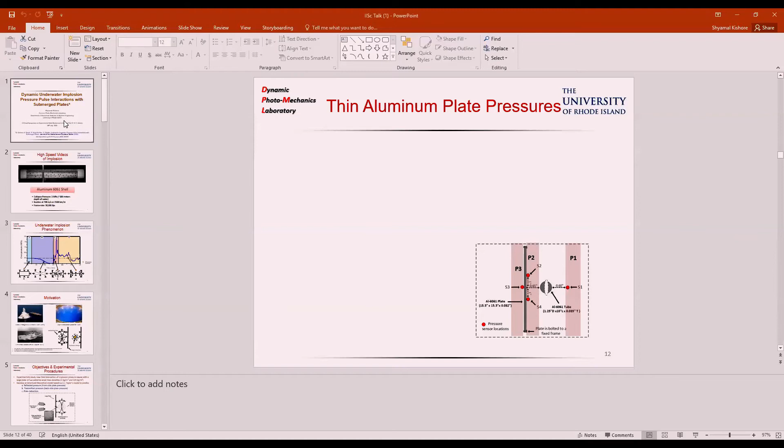Thank you, Professor. Can you hear me all right? Yes, you have about 25 minutes. Okay, at the 20th minute I'll give you a reminder.

All right, thank you. So thank you for the opportunity to present and thank you for the introduction. So as Professor Swanti mentioned, I'm the student of Professor Arun Shukla, and Professor Simha is known to my advisor, and it is my honor to present at the symposium which is organized in his honor. So first, on behalf of all the students at our lab, I would like to wish Professor Simha a very happy retired life.

And with that note, I would like to introduce the topic of my talk. Today I'm going to be talking about dynamic underwater implosion pressure pulse interactions with submerged plates. I'm sorry, if I can just turn my video on.

So today I'm going to be talking about dynamic underwater implosion pressure pulse interactions with submerged plates. So what is implosion? Essentially, it is a rapid, dramatic collapse of shells under hydrostatic pressure. And since we are looking at underwater situations, there can be a very complex fluid structure interaction phenomena that can occur when there is another structure nearby. Implosion is usually accompanied with a very dynamic pressure wave that is released and can be damaging to a nearby structure, and that is why this problem is of interest to us.

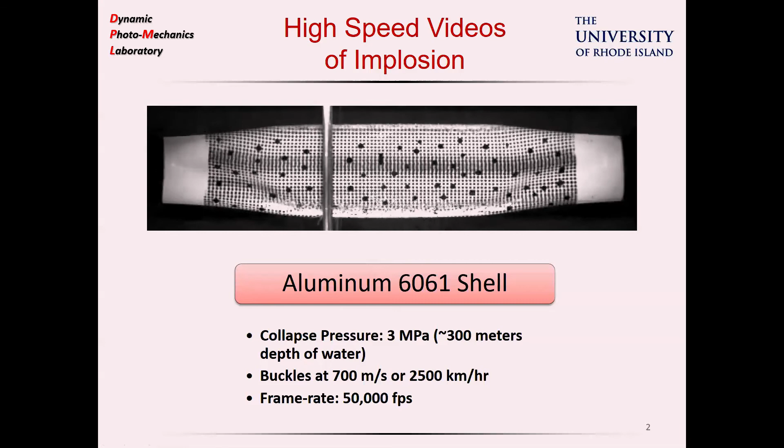And I'll play the video right now. The collapse pressure of this tube was about 3 megapascals, or about 300 meters depth of water. Because this video is taken at 50,000 frames per second, it is hard to appreciate the speeds at which this process occurs.

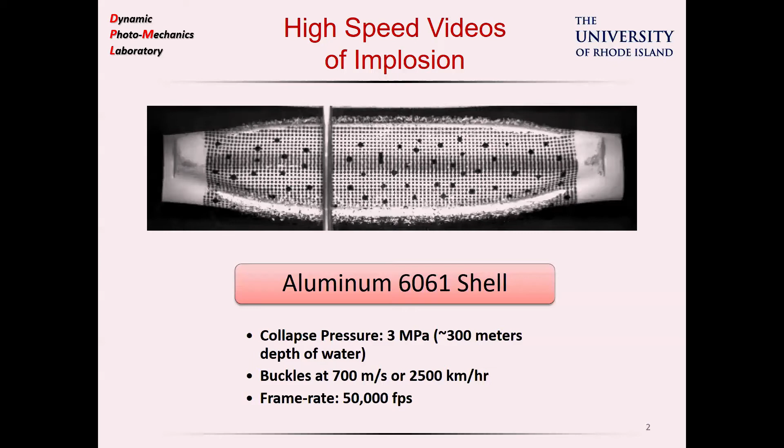In the implosion, the buckling waves can reach velocities of 700 meters per second, or 2,500 kilometers per hour. The associated fluid motion, when brought to rest, can really result in damaging pressure waves, and that is why this problem becomes challenging and hard to understand and predict.

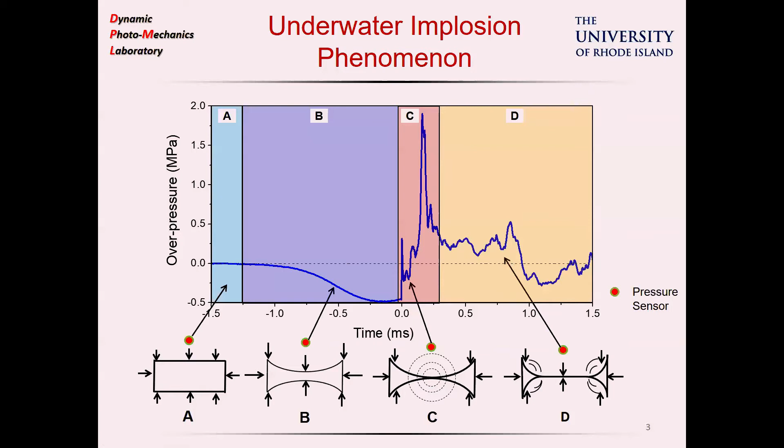In phase C, the wall contact occurs - you can see the wall contact occurring here, and that is accompanied by this small minor acoustic spike. Then as the wall collapse begins to propagate along the length of the tube, we have a large, broad overpressure spike followed by a decay profile, which is based on the length of the tube and other such factors. This overpressure spike, in addition with the underpressure pulse, can be extremely damaging to a structure surrounding next to it.

We would also like to apply some of the knowledge gained in this work to problems such as interaction of shock waves underwater with structures such as ships. Here's an example: shock testing of the USS Gerald R. Ford, an aircraft carrier, which was tested for its response to a massive shock wave occurring at a distance. This problem is of interest to the Navy.

Another relevant example, in the case of India, is India's only loss of a battleship in war: INS Khukri, off the coast of Diu in Gujarat in the 1971 war. There were 194 casualties when a submarine torpedo hit the ship, causing its loss. Shock waves from underwater can really cause damage to structures, and that's why we want to study dynamic pressure pulses interacting with structures.

In terms of implosion, a very interesting accident occurred in Japan at the Super-Kamiokande Neutrino Observatory, where a huge array of borosilicate glass shells is used for neutrino observations. One of these glass shells imploded under pressure, causing a cascading implosion of 7,000 nearby shells. This highlights that when an implosion occurs, there can be a cascading effect of shock waves propagating outward, which can implode further structures, damaging secondary structures.

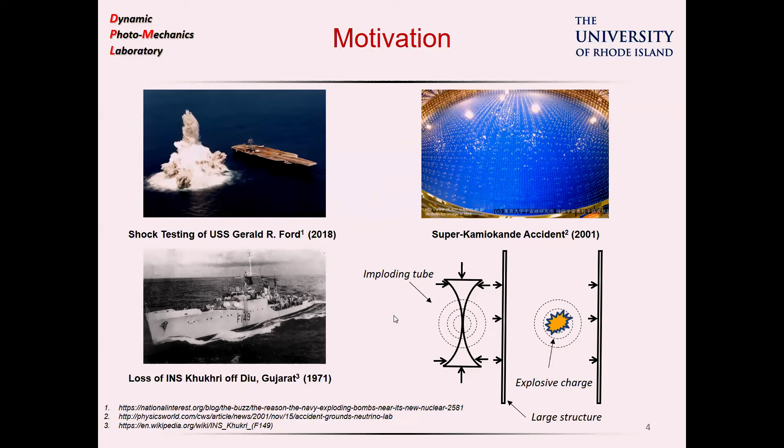The objectives of this experimental study are to experimentally study the fluid structure interaction process with two plates of extreme areal mass densities: one extreme at 2 kg per meter square, and the other at 100 kg per meter square. Based on that, we want to develop a theoretical model starting from G.I. Taylor's original model from the 1940s.

We also mount dynamic pressure sensors at various locations. Reflected pressure is the pressure seen on the plate on the side facing the dynamic pressure source, here the implodable. We also want a measure of transmitted pressure, the pressure that travels across to the other side. If there's water on the other side of the structure, transmitted pressure can go onto that side, causing a damaging effect on structures.

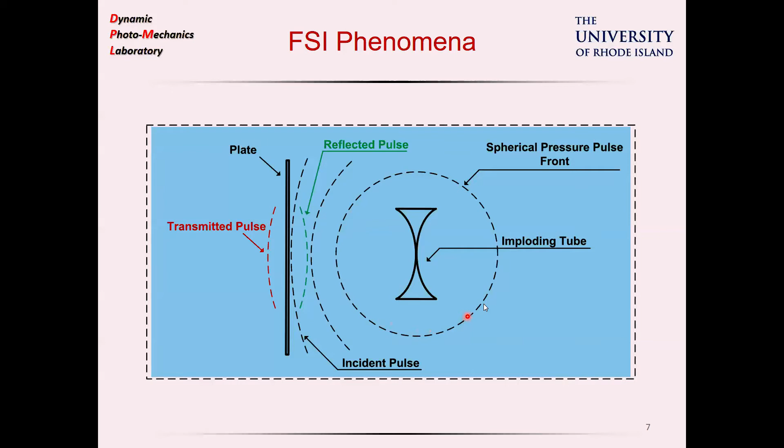The assumption we're making in this study is that the pressure wave released from an implosion pressure front or implodable structure is spherical in nature, although that is not truly the case. However, it helps simplify the explanation of the phenomena a lot.

When the structure implodes, the plate itself gets drawn in with the under pressure pulse. As the fluid moves towards the collapsing walls, the plate also gets drawn in. Once the tube makes wall contact, the overpressure pulse is reached, and then there is a return or retraction of the plate deflection.

However, in our study, we did not observe the retraction back to the same levels as on the other side. This can be understood in the sense that once the fluid is being pushed towards the collapsing tube, there is momentum in all the fluid surrounding the plate, so it's hard to push back all the mass of water attached to the plate and swing it back completely like an oscillator on the other side.

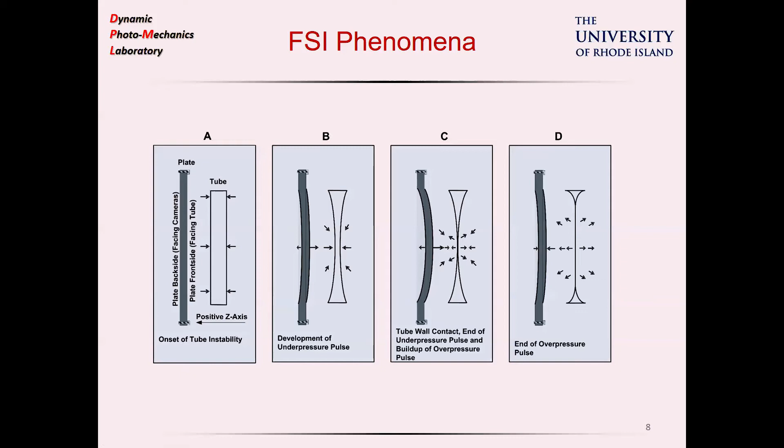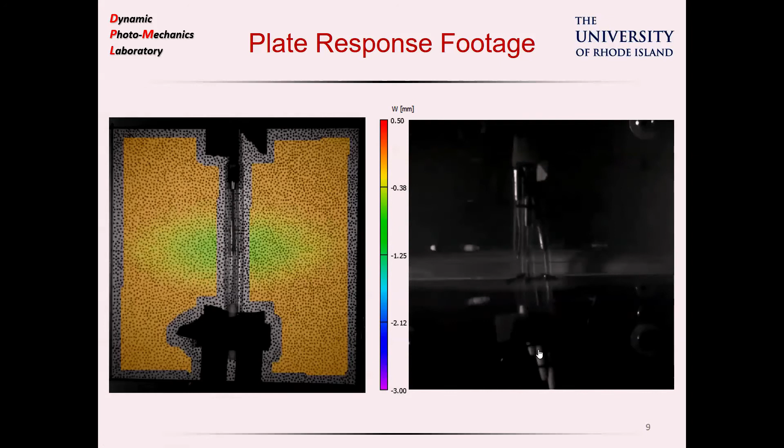At the center, you'll start seeing elliptical contours develop based on the profile of the implosion. I'll play the video so you can see what is happening: the wall collapses, followed by the elliptical structure developing, which then propagates outwards, and eventually boundary effects start to play a role.

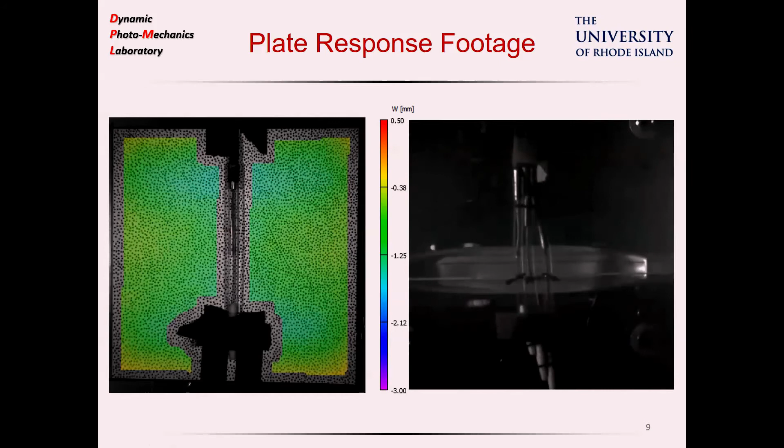So what about the pressures themselves? We look at three planes of interest. The first plane, P1, is right behind the tube itself at a distance of about 0.5 inches. On plane P2, we mount sensors measuring the sum of the incident and reflected pressures. On plane P3, we measure the transmitted pressures.

In the thick case, we consider two plates: this is the case of 100 kg per meter squared areal mass density, a thick steel plate of half-inch thickness. What we expect to see here is a large reflected pressure because the incident wave interacts with what is almost like a rigid body.

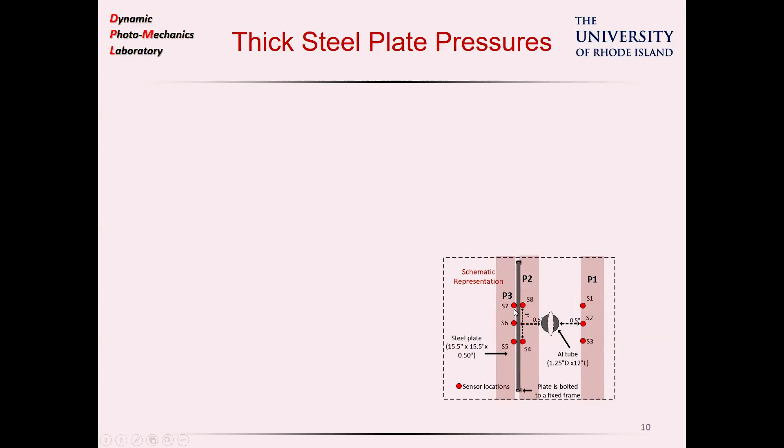When a pressure wave hits a rigid structure, the pressure doubles. So that is what we will see, almost a doubling of the pressure on plane P2. But on plane P3, we will see a small amount of transmitted pressure.

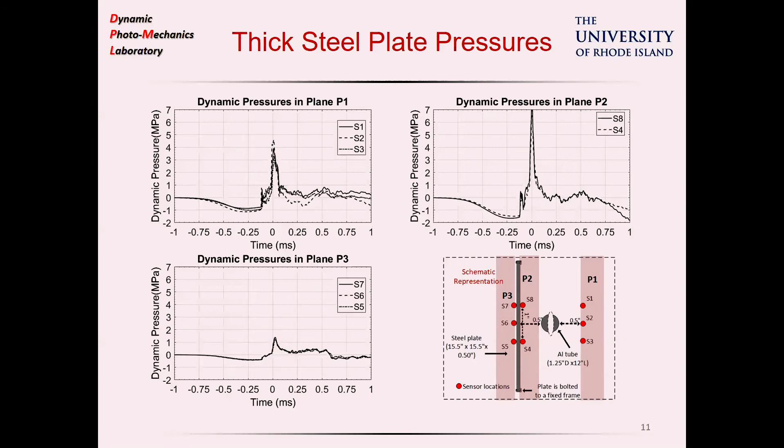Here are the plots of this example. On plane P1, we have a pressure profile with an overpressure peak of about 4 megapascals and an under pressure peak of about minus 1 megapascal. This almost doubles on plane P2 to about 7 megapascals and almost minus 2 megapascals. There's a small amount of transmitted pressure, about 1 megapascal and about 0.5 megapascal. This is what we expected based on the thickness of the plate: a very small amount of pressure pulse transmitted on the other side.

Now what happens when we have a low areal mass density case? For that, we consider a thin aluminum plate of about 32 thousandths of an inch thickness. Aluminum has low density, so the areal mass density reduces.

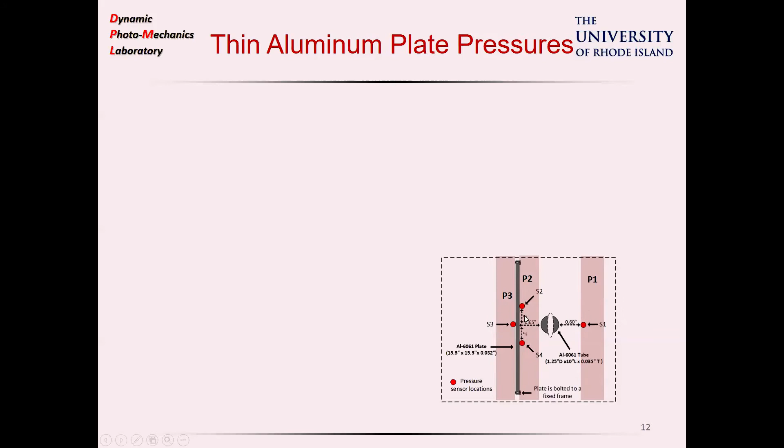In this case, we see very small, negligible actual reflection. What you'll see on plane P2 is basically the incident pressure itself, and on plane P3, almost all of the pressure gets transmitted, as seen in these plots.

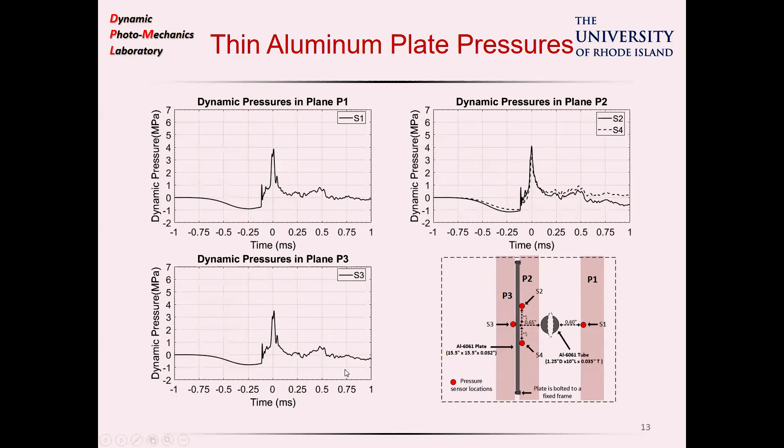Here's the incident pressure pulse, and the reflected pressure pulse is almost the same height and profile, with the transmitted pressure also about the same profile. This is in much contrast with the previous case. So how do we understand this theoretically?

Foundation work was done by G.I. Taylor, who developed a single degree of freedom model in 1963. So what I will do, my theoretical modeling is done in 4 steps. So first I take G.I. Taylor's single degree of freedom model.

I generalize it to a generalized pressure wave, because G.I. Taylor's work was done for an exponential decaying shock wave, so I generalize that for a pressure wave like this. G.I. Taylor's work also only includes air backing, meaning there's no water on the other side, so in step 2 I add a water backing effect to this first step. The first step I call model 1 for convenience, and step 2 is model 2 with the water backing.

Then step 3 is where I add a bit more difference compared to G.I. Taylor's work. In this model we incorporate plate bending, and this plate bending solution was given by Sneddon in 1946 for a Gaussian pressure distribution. So I use that solution provided by Sneddon to follow the same steps followed by G.I. Taylor to come up with a model that can predict relevant quantities.

However, there's one more correction I'd like to make, and that's how we understand the fluid velocity. In G.I. Taylor's model we essentially assume an acoustic kind of fluid velocity model. However, when we include Rankine-Hugoniot effects to describe the fluid velocity, there's something called afterflow fluid velocity, which is not just the main pressure wave, but something following behind the pressure wave associated with large fluid motion, and that has an associated pressure. So that velocity has to be corrected for this afterflow fluid velocity, which was proposed by Arons and Yennie in a 1948 paper.

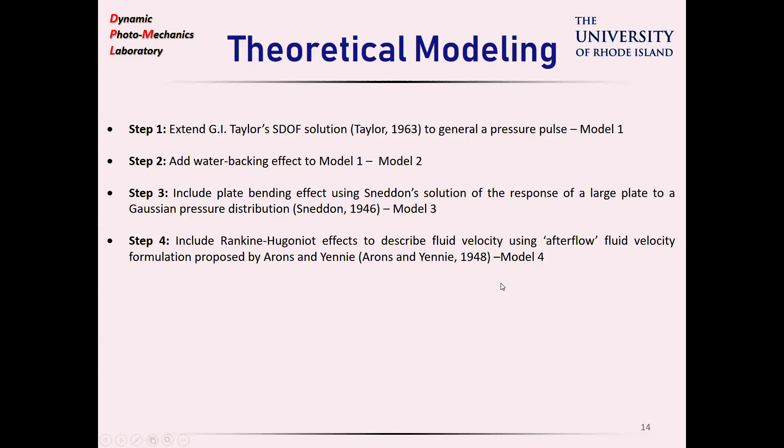So I combine these characteristics to develop model 4, which is the best model provided in the paper.

First, to begin with application of Taylor's model, here's a schematic. We have a pressure wave going out, and we have to assume a uniform planar distribution in this case. Taylor's model considers an infinite plate, and uniform pressure distribution is only strictly true when the pressure waves are coming from a large distance. So when we have implosions occurring in close proximity, or a shock or explosion going off in close proximity, this assumption is not strictly true. That's one of the limitations of Taylor's model.

So what Taylor does is consider the fluid velocity with this equation, pressure over rho times c, which is a well-known acoustic formulation of the fluid velocity. And we consider an areal mass density of m, which is mass per unit area of the plate.

So on this side of the plate, the pressure acting, the force acting on the plate, is basically pi plus pr, incident plus reflected, times the area of the plate. Then on the other side we have a transmitted pressure, pt times area. So the net force acting on the plate is pi plus pr minus pt.

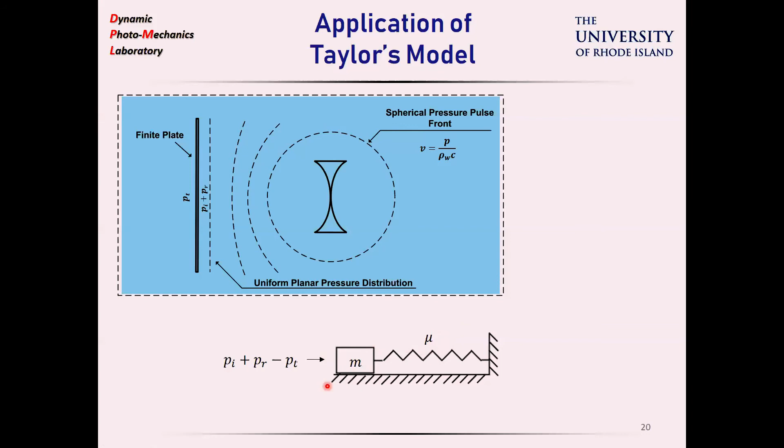Taylor's model considers this as a single degree of freedom model with a spring, and the spring essentially accounts for the finiteness of the plate. If you can figure out through other means what the frequency of the plate is, that frequency is given by mu, and we have an areal mass density of m with the force acting of pi plus pr minus pt. So Taylor's model essentially develops this kind of system for the plate.

One more thing is the equation of continuity considered at the plate, which is an extension I've done of Taylor's model: the velocity induced by the incident shock or incident pressure minus the velocity induced by the reflected pressure should equal the plate velocity, and should also equal the velocity of the fluid induced by the transmitted pressure. These are the 3 basic steps of the model, and this is model 2. For the sake of time, I would only be discussing model 2 and model 4.

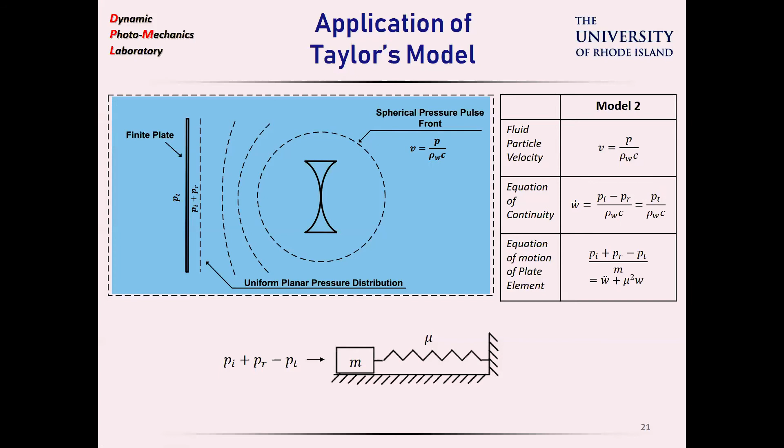In model 4, I take the solution provided by Sneddon, who calculated the plate response in air to a Gaussian pressure distribution. This Gaussian pressure distribution can be a generalized load distribution profile applicable to any kind of shock loading, ballistic loading, or other dynamic problems of such kind. Sneddon considers an infinite plate with plate bending stiffness.

And the equation of motion transforms in this way. We have the net force on the left side, same as before, then we have the inertia term, and plus we have this other term. We've gotten rid of the spring force, but we've added this plate bending term, which is b squared times del power 4 of w.

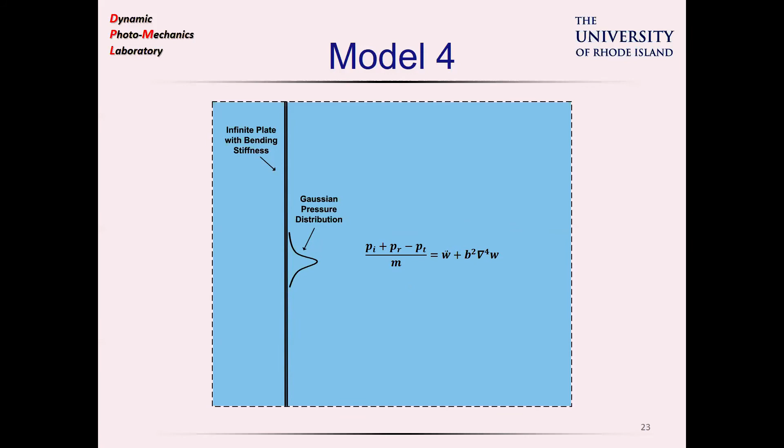So this is the solution that Sneddon provides in air. I have combined the solution provided by Sneddon for the fluid domain and also incorporated the equation of continuity for this case. So what is the difference in terms of the afterflow fluid velocity?

There are two parts of this fluid velocity. One is called the radiated flow flux, basically the energy that is released outwards and never returns back to the source of the implosion, and the flux is proportional to 1 over r squared. If you take a sphere enclosing the source, of an area proportional to r squared, the energy is always constant at any radius, which means the velocity is constant at any radius, which means this is going outwards to infinity and not returning.

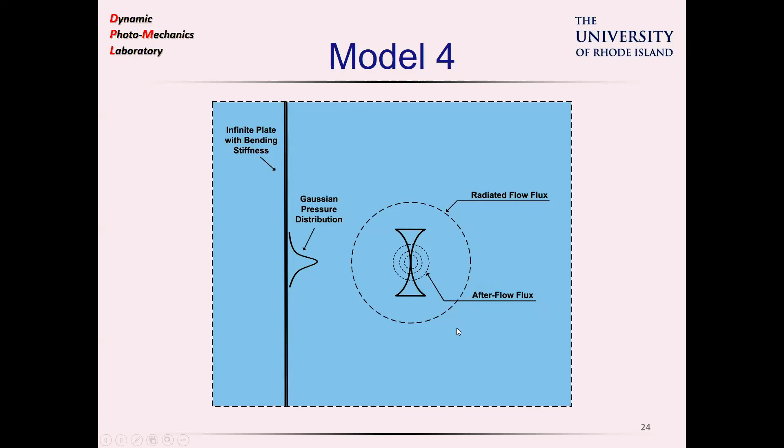Then there's a second term for a spherically emanating pressure wave called the afterflow flux, and the flux there is proportional to 1 over r cubed. So when you multiply this with r squared area, you get 1 over r dependence. That 1 over r dependence is shown here, and this is how we calculate the velocity, provided by Arons and Yennie in the 1948 paper for a spherically emanating pressure wave. So this is a hysteresis effect.

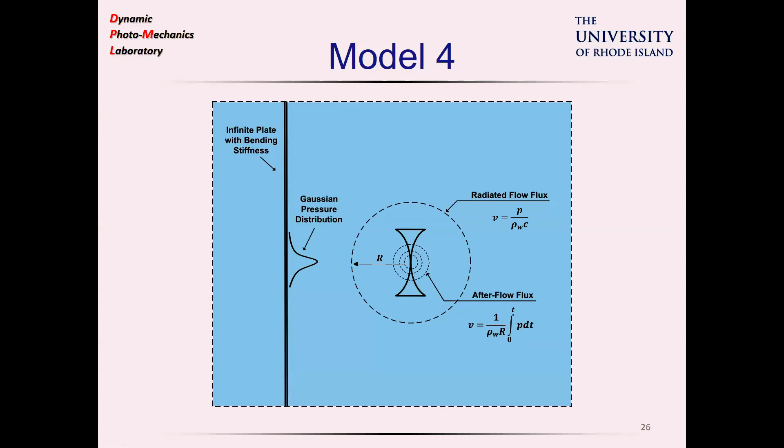So now I go on to talk about the results of the model. In presenting the results, I will use two terms: front side pressure and backside pressure. Front side pressure is basically the incident plus reflected pressure. Backside is the transmitted pressure.

However, when we go to the model for the thin plate case, we see that the model performs better, and that is because much of the inertia is removed from the plate itself. So the plate thickness doesn't really play much of a role, since the model doesn't incorporate this afterflow fluid velocity.

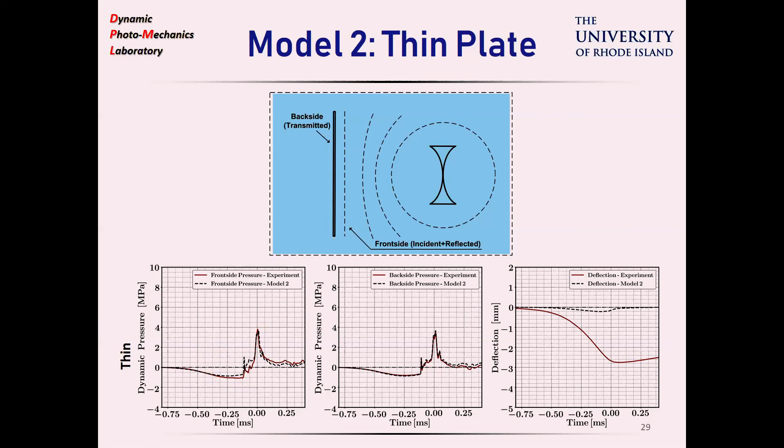From model 4, the predictions are much better, and you can see that the overpressure profile is predicted much better, and the transmitted pressure is predicted much better. The plate deflection here is over-predicted because

we are assuming an infinite plate sort of assumption. So the plate displacement is definitely going to be larger than the actual experimental data, and as expected, we get a good match also with respect to the thin plate case.

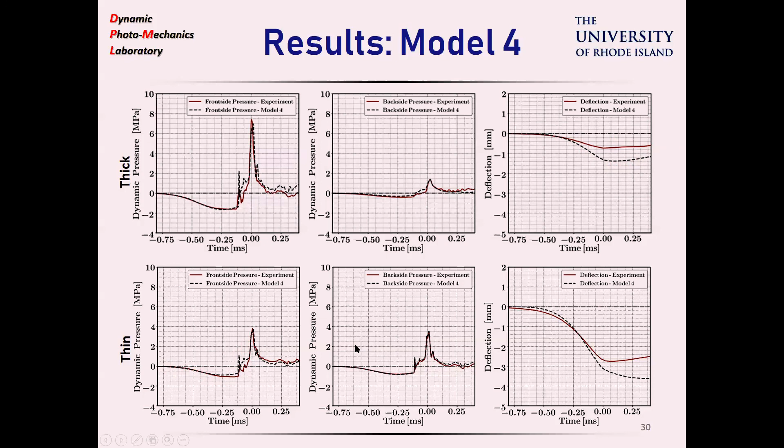So in conclusion, here are a few important conclusions of the study. We have looked at a thin aluminum plate with low areal mass density, and we see that it is almost permeable to the implosion pressure pulse. Almost all of the pressure is transmitted, and almost nothing is reflected.

For the thicker steel plate case, this almost doubles the front face pressure compared to the incident pressure pulse, and we have a small amount of back face pressure. Model 4, which is based on a Gaussian distribution of pressure, is doing much better than the single degree of freedom model proposed by Taylor.

Also, the areal mass density of the plate is a governing factor, as I've not explained fully in detail because of lack of time. However, the areal mass density is one of the most important factors in the determination of the front face and back face pressure profiles.

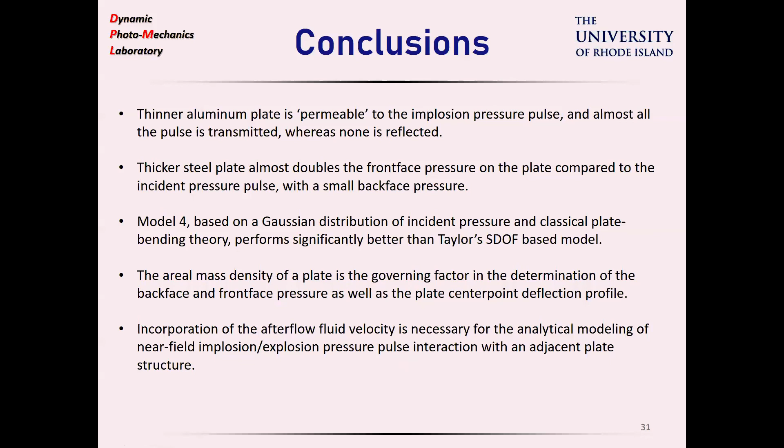Incorporation of the afterflow fluid velocity really improved our modeling predictions, and I think it is necessary for prediction of such quantities when large explosions occur, or dynamic pressure pulses such as implosion pressure pulses occur near a plate structure.

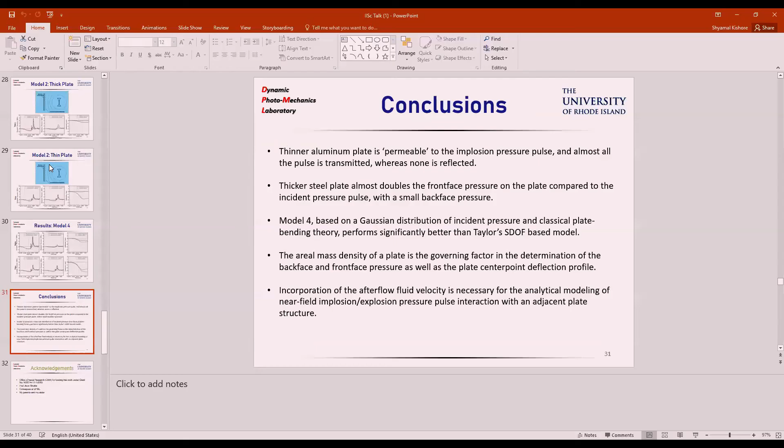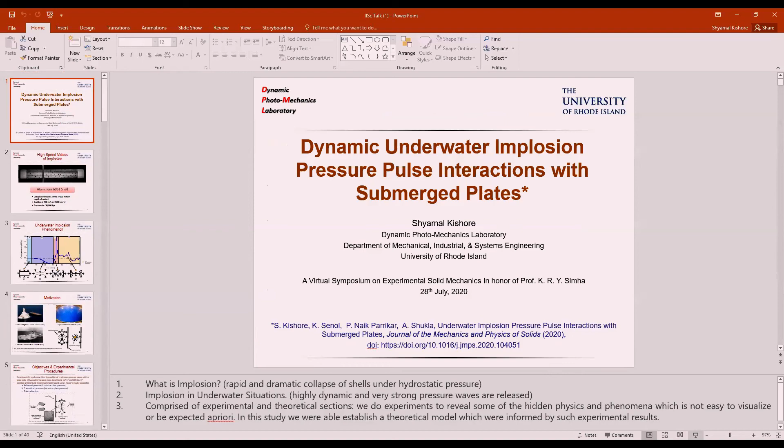There are a couple of questions, I'll unmute. Mr. Rishabh, you can speak up. Let me relay the question: why wasn't damping considered? Hi, can you hear me? Hi, Mr. Kishore. I wanted to ask you, when you created the model, why didn't you consider damping in the model?

We did consider damping in the model, but the equation that comes out is really complicated to solve, and there is no analytical solution available for that kind of equation when you include damping. So we were restricted to going with the model without damping, and it turns out that the predictions work very well even without it. In the case of fluid motion, when you consider water, the damping effects are not as strong. The kind of damping that occurs is basically from the added mass effect, or the inertia: when the fluid moves, the acceleration of the plate itself can radiate some of the energy away from the system. So that's more of a fluid-structure interaction form of damping rather than structural damping. Metals also generally have low damping coefficients. These are the few reasons why we did not consider damping.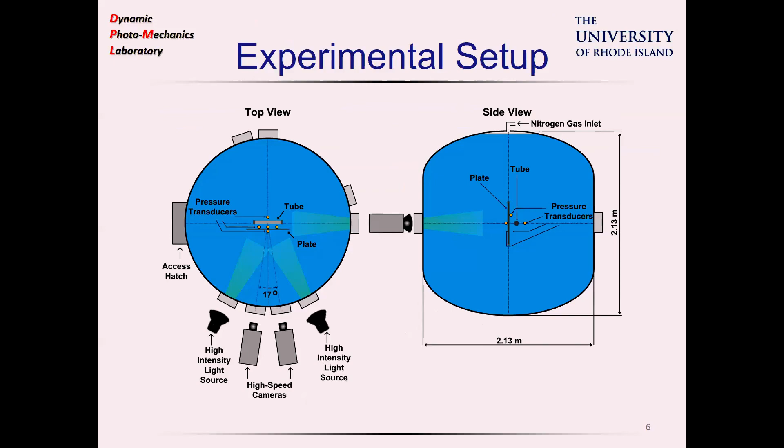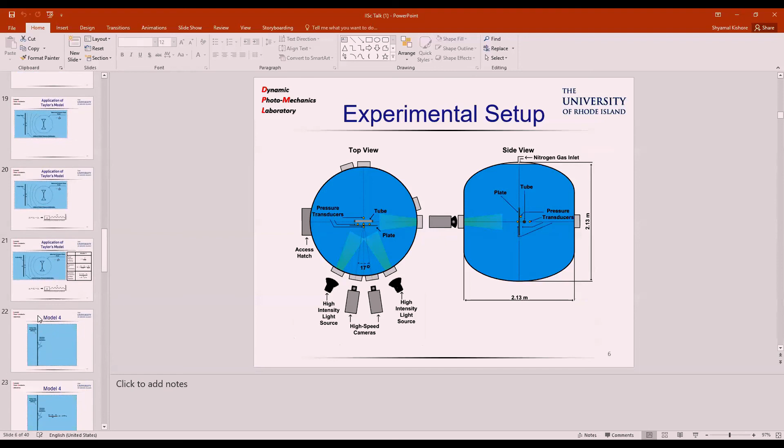One about your loading conditions: you said you used a Gaussian for the loading on the plate. I'm assuming that comes about because you have a spherical wave, but didn't you say that at some point it becomes a plane wave already? That is the previous model, based on G.I. Taylor. In Taylor's model, the assumption is of a plane wave because the explosion is assumed to occur at a far distance. However, in our case we have a near field implosion, so we developed a separate model which considers this. We do not assume the spherical wave becomes a plane wave due to distance; instead we assume the spherical wave is applied like a Gaussian pressure distribution, since there is a solution available by Sneddon in air for the plate deflection in this case.

Just a detail about the imaging you did: was there ever an issue with having to phase match the fluid refractive index with your window because of the lighting, or was that never an issue? Yeah, this was an issue actually. I'm not the original author of that work; this is one of the foundation works done in our lab with Professor Shukla. The lab was a pioneer in developing underwater DIC measurement techniques. They did a calibration process that considered refraction, underwent several iterations of the study, and finally came up with a paper explaining this in detail. I can send you the link to that paper to explain this better. Great, thank you very much.

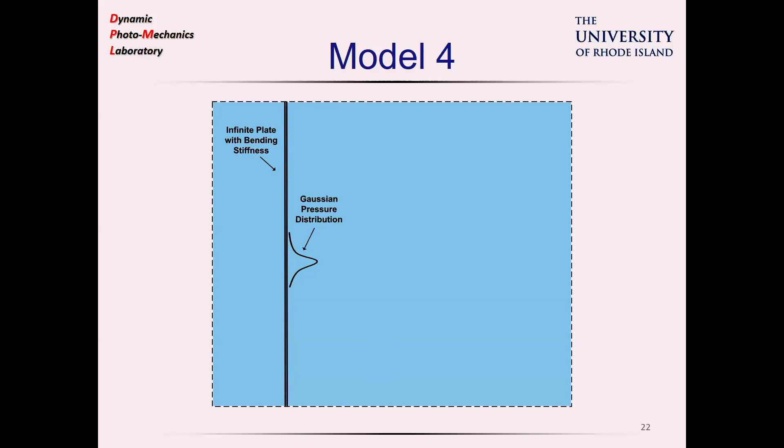One last quick question from Shri Krishna, please go ahead. Sir, actually that question was for Professor Tejas, so I'm sorry about that. No worries.